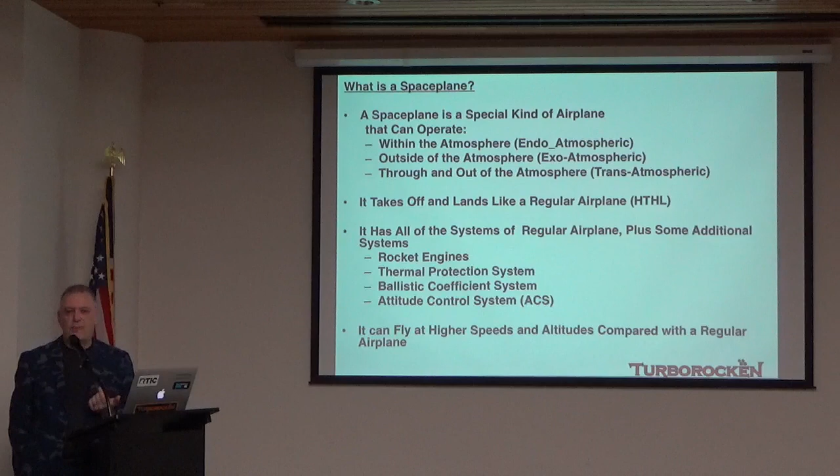Dash number 3 is the ballistic coefficient system. Now what I mean by that is a way that you can control the ballistic coefficient of the vehicle, of the spaceplane. And I'll get into that more later in the talk here and explain some of that. But that is an attribute that is not as appreciated, but is nevertheless important.

And last, we might have an attitude control system, an ACS system. If you're out of the atmosphere, you don't have conventional aerodynamic surfaces to react to control the roll moments of the system - roll, pitch, and yaw. These are moment parameters, moment dynamics of the vehicle. If you don't have any aerodynamic surfaces like conventional aircraft because you're out in space, then you're going to need some sort of an ACS system.

Now this could be a cold gas system, moving you around, controlling your pitch, roll, and yaw. But it could also be an electromagnetic or torque coupling kind of system. These consist of rotor wheels that exert torquing forces as you use a motor to accelerate or decelerate a wheel. You can have a wheel on each axis, and by accelerating and decelerating those wheels, you can exert torques to control the ACS system. So those systems require power, but no gas - a good trade-off there. And once you're out of the atmosphere, you're going to need an ACS system.

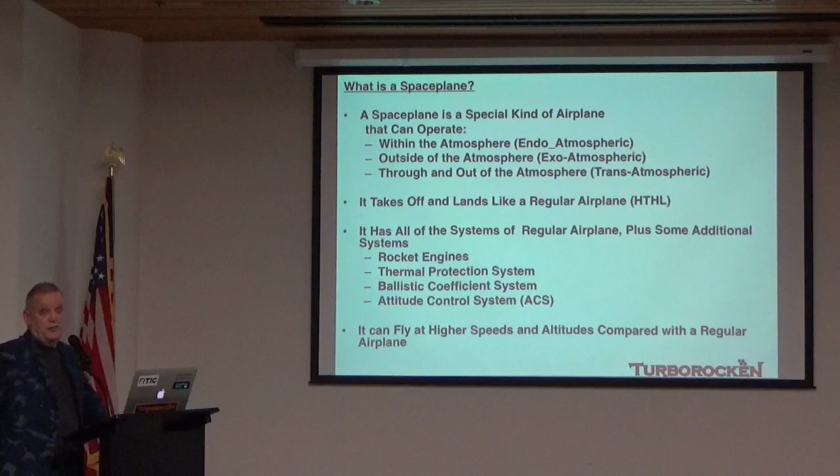Perhaps the most important aspect of spaceplanes is that they fly at higher speeds and altitudes compared to conventional airplanes, and that's what we like about them, and that's what makes them exciting and interesting. So from a usage standpoint, what are some of the fundamental advantages of spaceplanes for space access? And when I say space access, I mean not just orbital access, but suborbital - basically, getting up into an exoatmospheric kind of condition, and the broad range of speeds and altitudes that might entail.

In this world, we adjudicate our performance with a parameter known as the delta V, or the delta velocity. This is a standard term that I'm sure most of you all are very familiar with. The delta V is kind of the change in velocity that your vehicle can experience given the performance limitations of the vehicle itself. It's sort of the coin of the realm for aerospace trajectory analysis.

So the way to think about it is, if you have a vehicle with a given starting mass, the mass initial, and it can expel mass out the back at a velocity of V sub E, the exhaust velocity, then by the time you've expelled all of the propellant that you have on board, at that given exhaust velocity, you will have changed your velocity by delta V, by that amount. So it's just a very simple dynamic equation that applies to rocket vehicles, and you can also roll in terms like drag and gravity to still make this term usable.

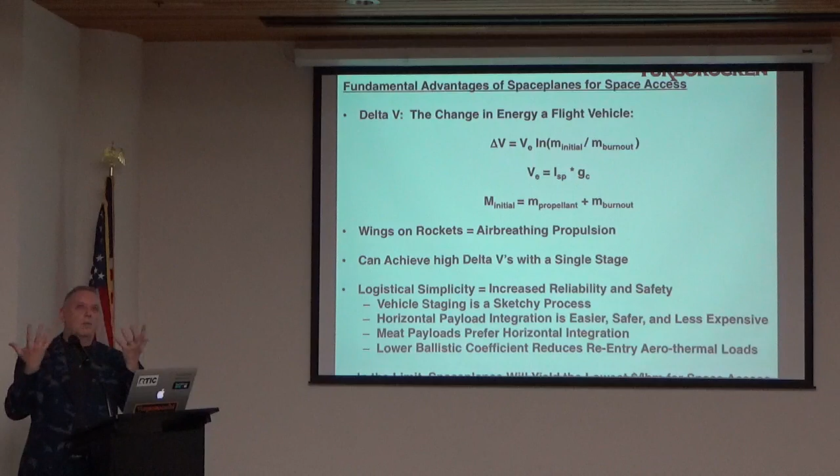It's relatively efficient, because as we know, in a vehicle at steady state velocity, the lift-to-drag ratio equals 1 over the thrust-to-weight ratio of the vehicle. So you can see that if you have a high lift-to-drag on a typical vehicle, you can convert that thrust efficiently into a lift component.

Another way to visualize it: imagine a rocket-powered airplane with a little rocket and wings, and now an identical one pointing in the opposite direction—one flying north, one flying south. Then you put a beam between those two, turn them on, and now they're spinning around.

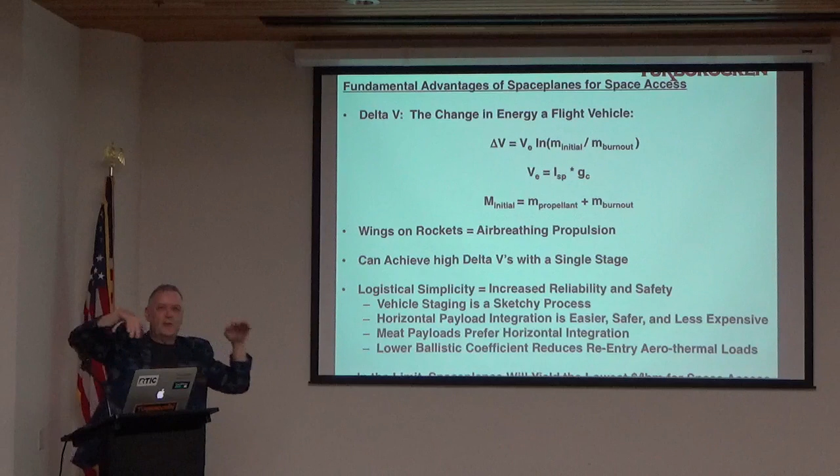So they're kind of a rocket-powered wing. Is everyone tracking this visualization? What's going to happen to that thing? It's going to be like a helicopter—it's going to helicopter up.

In essence, now you're generating air-breathing propulsion—you're reacting air mass down from the rocket-powered fan. That's an example with two rocket planes and a finite radius. But a rocket-powered airplane or spaceplane on an ascent trajectory can be thought of as one of these fan things, but with an infinite radius of boom, if you will.

So I hope you'll keep that in mind and ponder it in your spare time. Are you just trying to be clever with that? No, I'm not.

I'll tell you why: my definition of air-breathing propulsion is a bit more broad. It's using the ambient atmosphere or ambient fluid to create forces on your flight vehicle, and that can be any type of force—lift forces through a wing, or deceleration forces through a heat shield. We don't normally think of a heat shield as air-breathing propulsion, but in the strictest definition of exchanging momentum and generating forces on an aerodynamic vehicle, a heat shield is an air-breathing propulsion system.

So anyway, I leave that to your cogitation.

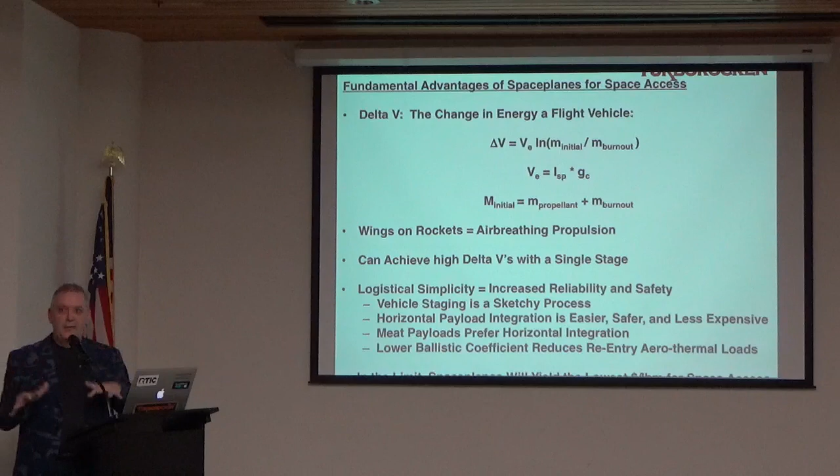Now, unfortunately, the last bullet didn't show up on the screen, so let me tell you what it says. It says, and this is again probably something you might find controversial, I claim that in the limit, space planes will yield the lowest dollars per pound per delta V for space access. And that's not my opinion, that's math. We can walk you through the math on that. If you have a winged vehicle, especially with air-breathing propulsion, you're going to be cheaper in the long run than a vertically launched, staged launch vehicle in terms of dollars per pound to orbit. That statement is freighted with a lot of assumptions, but I urge you to consider it deeply, because it's true.

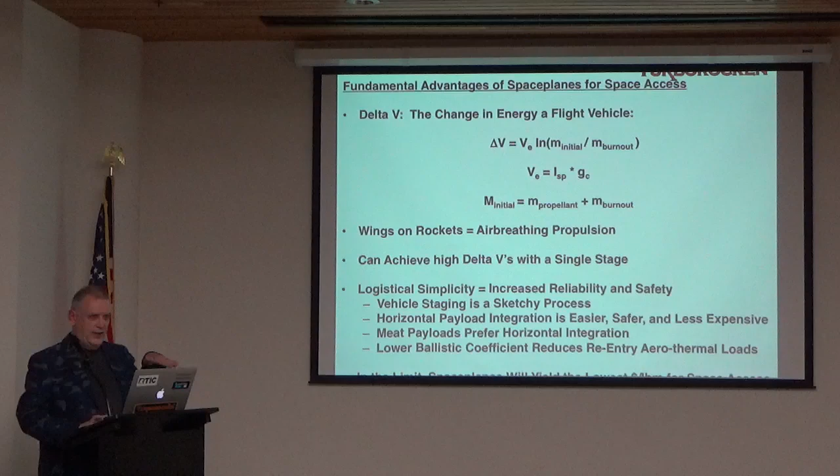I'll take a quick question. I normally don't take questions during my talk, but if it's fast, I'll take one. Do we have sufficient ISP to launch with a single stage now? For vertical launch or horizontal takeoff, horizontal landing? Or the space plane kind of thing, is that what you're talking about?

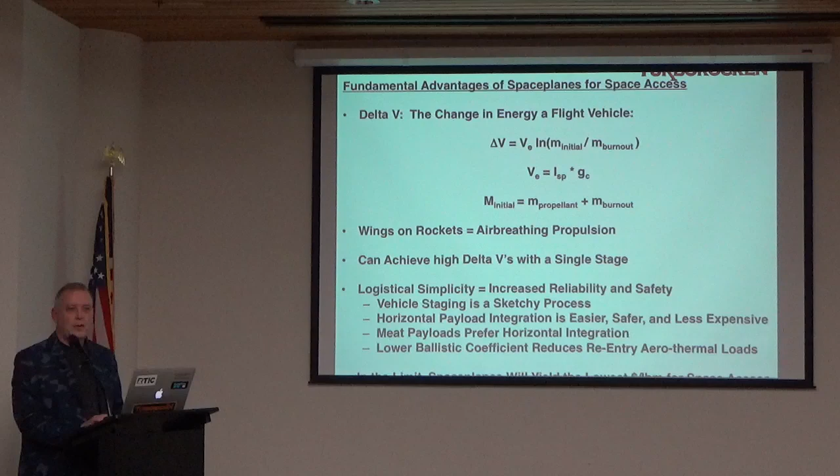That has not been shown, but the theoretical indications show that's clearly possible. I'm going to show you some space planes that, for many developers, they believe it to the tune that they're willing to invest tens or hundreds of millions of dollars in developing those vehicles. But I think it's a good point to bring up. At this point, a horizontal takeoff, horizontal landing vehicle taking off with no staging and achieving orbital velocity has not been demonstrated. Some people say it's impossible. Those people are wrong.

So, space planes. Let's look at a few examples, some familiar to you, some less familiar. Actual space planes I group into the space shuttle, our 30-year friend. Another one is Dream Chaser, being developed by Sierra Nevada Space Systems, a small kind of mini shuttle, if you will. X-37, kind of a classified Air Force vehicle. And then, of course, the legendary SpaceShipOne and now SpaceShipTwo vehicles. These are actual ones that have been built, flown, go into space, and come back.

We also have a number of legacy systems that were proposed but never built, most notably the NASP, the National Aerospace Plane. How many of you worked on NASP sometime in your career? Anyone? Anyone? John, did you ever work on that? I think you did. I worked near it. Okay, you were NASP adjacent.

So, I worked on X-37. Did you ever work on NASP? Kind of a NASP thing.

Another one was X-33. It was kind of a suborbital vehicle that came out of the 90s. We'll look at that - that was another system that had a lot of stuff that was more proposed than built.

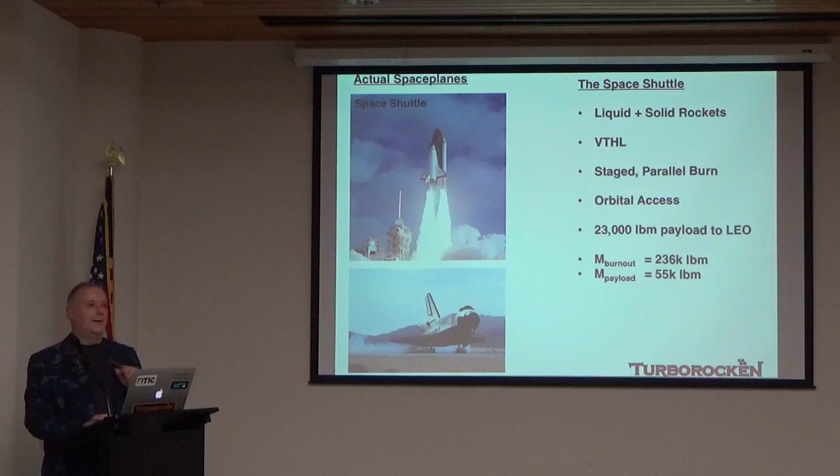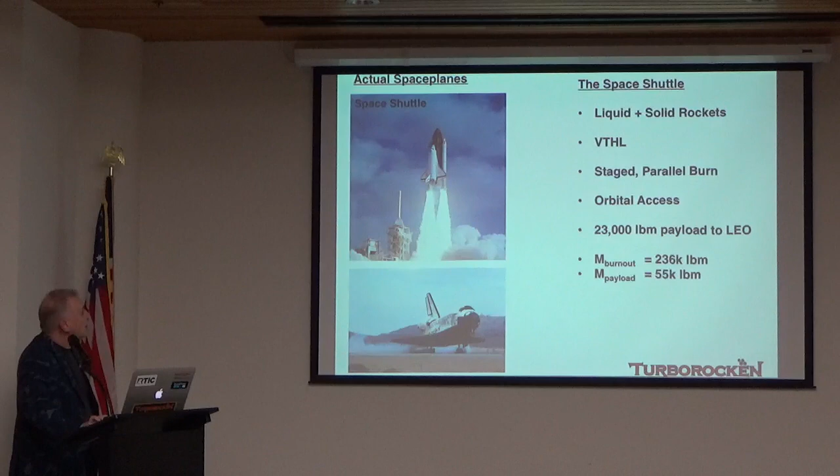It's kind of the superposition of the worst choices of all these systems. Solid rockets are a real challenge, and I think they're not a good choice for that - von Braun would be rolling over in his grave when the solids got strapped on the thing. Just my opinion. But an amazing vehicle - lands like a space plane.

Okay, Dream Chaser, currently developed by Sierra Space Systems. It's boosted on a main vehicle - vertical takeoff, horizontal landing, a couple of stages to get into orbit. The vehicle put in orbit is around 12,000 pounds, and a good fraction of that is payload. It can bring back up to about 4,000 pounds, so kind of an interesting vehicle, and lands on a runway on a front skid. Huntsville International Airport has been cleared to do landings of this vehicle, so they're looking at this as a possible return site for the Dream Chaser, which would be very...

John, was that one derived from the HL-20, the Langley HL-20? It could well have been - that had a lot of predecessor lifting body work, that one and maybe some others. I'm not quite sure on all of its history on that.

What is the booster it's using to get that up in orbit? Well, it's designed to be boosted by a number of vehicles. The baseline vehicle is the Atlas V, but it could go on other vehicles - it could go on a SpaceX Falcon 9, it could go on a Delta, it could probably go on a Vulcan, could probably go on one of the Ariane 5s. So it can fly on multiple systems, but its baseline is Atlas V.

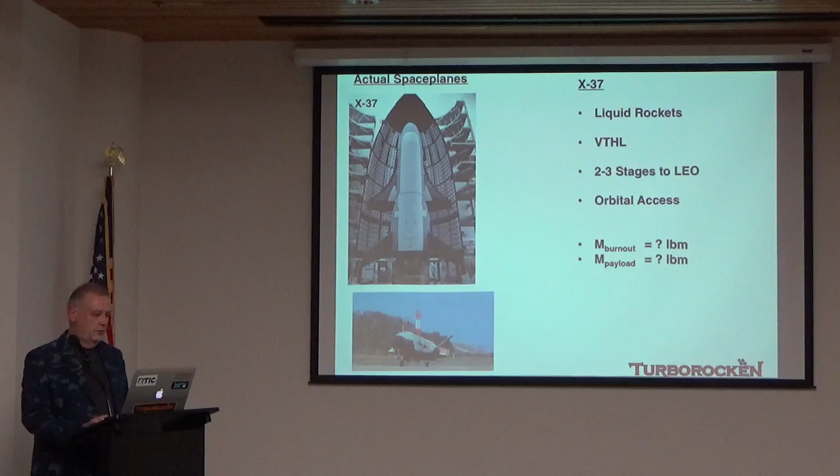Another one, and this is a significant one, which is SpaceShipOne. I presume you know this, but I'm going to go through it anyway. It uses a carrier aircraft called the White Knight 1, that gangly kind of thing with two afterburning J-85 turbojets on top.

SpaceShipOne is carried underneath. It climbs up to about 50,000 feet, then drops off, and its hybrid rocket motor lights and carries it on up to above 100 kilometers. That's called the von Karman line, by the way.

100 kilometers is considered the edge of space. The U.S. is a little bit different - I think they sometimes adjudicate it at 50 miles. But in any case, this vehicle flew on some amazing trips.

Its first flight was in the summer of 2004, and it came back down after that flight. It achieves about 3,000 feet per second total delta V, if you want to look at it from the delta V equation. It weighs about 2,000 pounds and can carry 3 people.

I had the privilege of getting a chance to work a little bit on that system. This is an important vehicle for me personally in my talk here because I see this vehicle as sort of the existence proof for home-built spaceplanes. I'll tell you why its emergence is true to that notion.

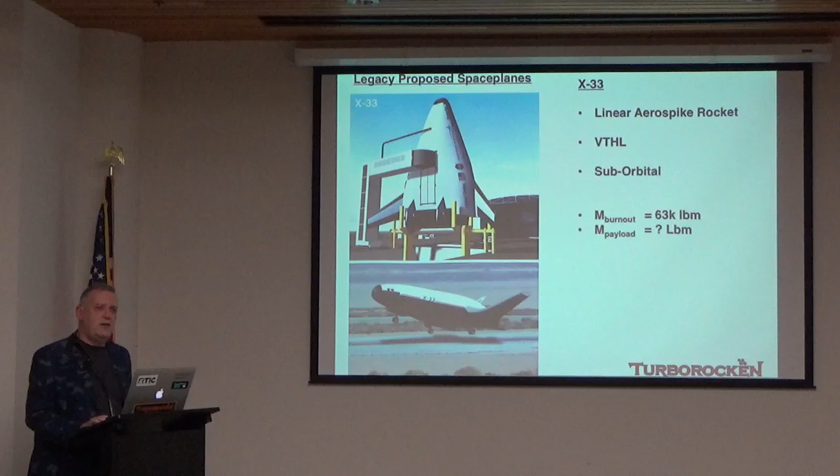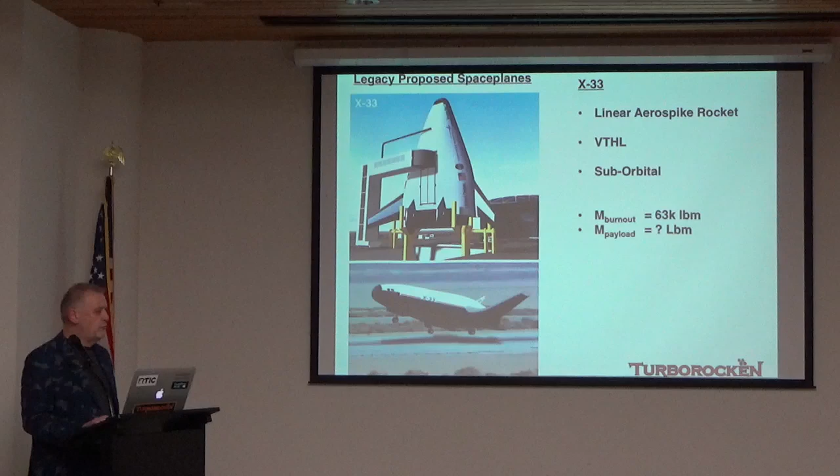Systems were tested. This was going to be a suborbital test bed, and the VentureStar follow-on program was going to be the bigger orbital vehicle. They built some test articles and a lot of the linear aerospike technologies. The linear aerospike engine for this system is actually out on the NASA rocket garden - if you ever want to see that, you can go out to building 4205 and see it there. Another interesting system, but again, kind of a bridge too far, and through some technical failures, it did not survive and was never flown.

This was developed in the 1970s and early 80s during the oil crisis, and the thinking was that we need low-cost access to space that can carry hundreds of thousands of tons of these space power satellites up into orbit and get them set up there.

We need a low-cost way to get those up there, so let's have a system that will do that. This was the system they came up with—an interesting conceptual design study. The system actually closed, meaning the design based on the performance they understood and predicted meant it could achieve the payload and delta V they believed it could achieve. Interestingly, the system used turbine-based combined cycle engines, TBCC engines, plus rockets, rather than scramjets. A very ambitious program, very cool aircraft, but again, never got off the drawing board.

The British also were developing and have continued to develop various spaceplane concepts. The most recent incarnation is the so-called Skylon vehicle. They're still working on that—again, horizontal takeoff, horizontal landing, single stage to orbit. It used a novel engine they now call the Sabre engine, or synergetic air-breathing rocket engine. Basically, it's a combined cycle engine with rocket-type parts and air-breathing parts, taking off as an air breather to get the high ISPs of an air-breathing system before transitioning to a rocket engine to make it to orbit. Again, the design closed. British engineers are some of the best in the world, and they believe the system could work.

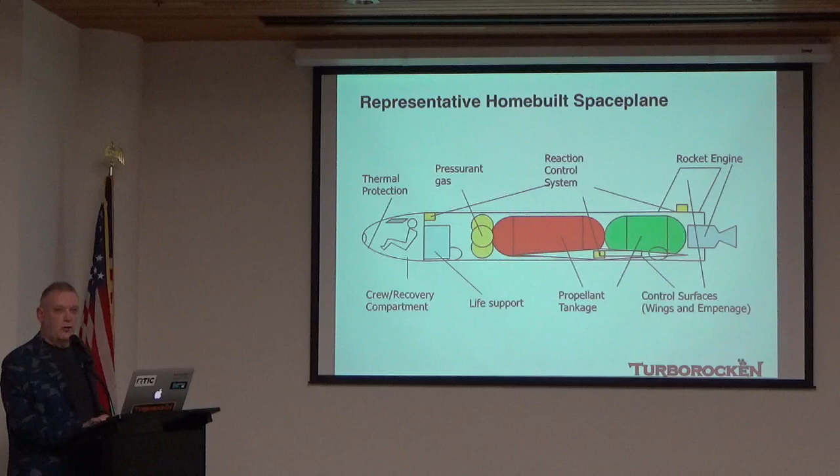It may have some sort of life support system, may have a thermal protection system for the crew, and it may have some sort of crew recovery system. We don't see that a lot - we like to have the pilots stay with the aircraft to the extent possible, though one of the pilots did bail out of SpaceShipTwo when it had its failure a number of years ago. He was the surviving pilot from that. So we don't go into crew recovery as much, but it's still a good thing to have in this picture.

The first is that you're going to have large propellant fractions. A typical airplane might carry about 20% of the gross takeoff weight of the aircraft as propellant.

Dave, you're building an RV-8. How many pounds of propellant do you take off with on a full load, about? 360 pounds. And what is the gross takeoff weight of your aircraft, full passengers, full fuel?

1,800. So 3 over 18 is a good fraction of what you would get. That's pretty good. RV-8 is a good plane.

Another aspect is the propulsion systems are going to be very high performance. They're going to be rocket engines, and hopefully combined cycle engines, which combine rocket engines and air-breathing engines. There's an example of that sitting on the table. We'll talk about that in a little bit.

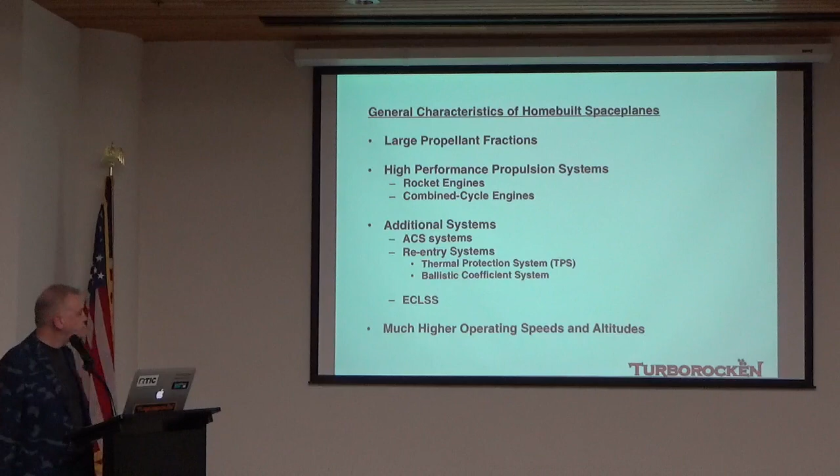The home-built space planes will also need additional systems that we've talked about. They'll need attitude control systems, ACS, cold gas thrusters, or a torquing system. They'll need systems to cover their re-entry, these are thermal protection systems, and also possibly a way to modify the ballistic coefficient of the vehicle, which I talked about and I'll explain in the next chart. And also environmental control and life support system, an ECLSS system, oxygen and temperature controls for the pilot. Sometimes the ECLSS system is nothing more than a space suit, sometimes it's a pressurized cabin. And of course, these vehicles will operate at much higher altitudes and velocities than a conventional airplane.

Now, I talked about the ballistic coefficient. We're going to do a little math here, so hang tight with me. The ballistic coefficient is a term that describes the ballistic characteristics of a vehicle. It's simply defined as the mass divided by the drag coefficient times some reference area.

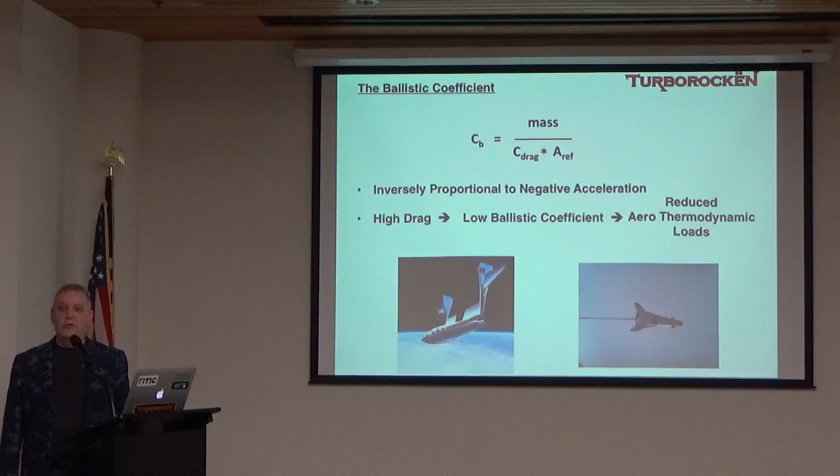If you're a shooter, a reloader, if you like guns, you're probably familiar with the ballistic coefficient for your bullets. The ballistic coefficient is inversely proportional to the negative acceleration. What I mean is if you have a very high ballistic coefficient, like a bullet has, it has, for its given mass, low drag and a low reference area. That means it doesn't decelerate as it's flying along. It penetrates through the air and targets.

Contrast that to a butterfly, which for its mass has very high drag and a very high reference area. So it's very fluttery, and when it's flying along and hits something, it doesn't penetrate very well. So its ballistic coefficient is low.

For aircraft vehicles, a low ballistic coefficient is good because it means the drag is high. High drag resulting from a low ballistic coefficient reduces your aerothermodynamic loads. In fact, if your ballistic coefficient is low enough, you can re-enter from orbital velocities with no thermal protection system at all. Imagine if you're a leaf at orbital velocity, at low enough altitude so you're starting to get a little bit of aerodynamic drag - there's a little bit even up at 100 miles. You can re-enter leaves without burning them up.

And there are a number of concepts for vehicles that have very low ballistic coefficients, and they have no re-entry protection, no TPS system. They just flutter in. Kind of a cool idea.

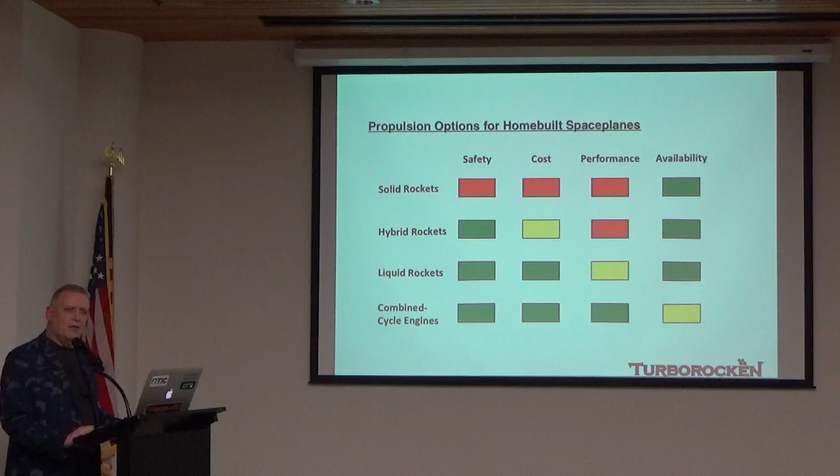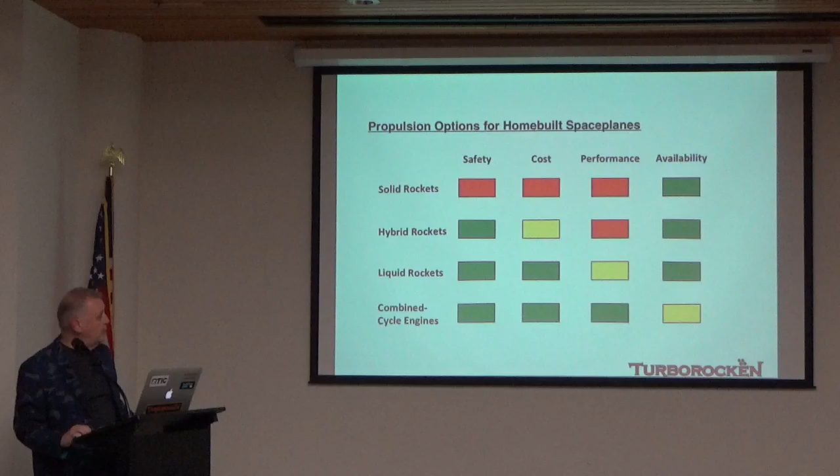What we see here: solid rockets are expensive, not that safe, but available. Hybrid rockets are pretty safe, the performance is meh, and they're not that cheap, we found out. Liquid rockets - their performance could be improved, it's kind of a baseline, it's what we're thinking about. They're available, and hopefully the Turborocket engine I'm going to talk about will help make that more feasible. Lastly, combined cycle engines, which are the union of rockets and air-breathing engines, can be safe, low cost, and have great performance, but they're not quite ready for prime time. We're working on that, and hopefully we'll have those ready for your Homebuilt Spaceplane project by the time you're ready to fly.

So based on that, propulsion is the enabling technology for these Homebuilt Spaceplanes. That's why propulsion was the last word in my title here, because if you can get a decent propulsion system, then maybe you can get a home-built spaceplane to have some halfway decent performance. That's what I hope you'll take away from this presentation today: the emerging propulsion options I'm going to talk about, and the Turborocket in particular, may be the enabling technology, and may allow these home-built spaceplanes to be realized.

I propose that the Turborocket engine is the propulsion solution for these kinds of systems. The Turborocket is a small, integrated pump-fed rocket engine system, sometimes known as a rotary rocket engine. These systems, because of misapprehensions on how they work, have been relegated to the dustbin of suboptimal technology. But I think the potential of these engines has failed to be realized because their operation has been misunderstood, and I'm hoping to change that with my development of the Turborocket engine system. They're relatively simple, inexpensive, and safe because they're not pressure-fed, and because of their unique geometry, they can be combined with other propulsion systems like turbojets to make unique combined cycle engines.

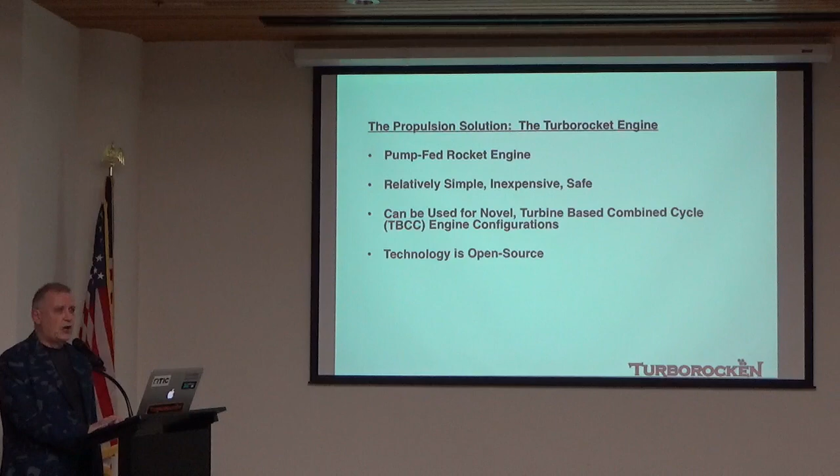Lastly, the Turborocket engine is open source - the technology is open source. Anyone with a good idea and a childlike sense of wonder can develop these kinds of systems. So what is the Turborocket system? If you'd come last week, you'd have heard the whole story. But if you didn't hear that, a Turborocket is a pump-fed rocket engine in which the rocket chamber, the nozzles, the reaction turbine of the system, and the pump - the parts that function as a pump - all rotate together as an integrated assembly. So it's an integrated pump-fed rocket engine. The engine is fully throttleable, meaning you can run the thrust up and down.

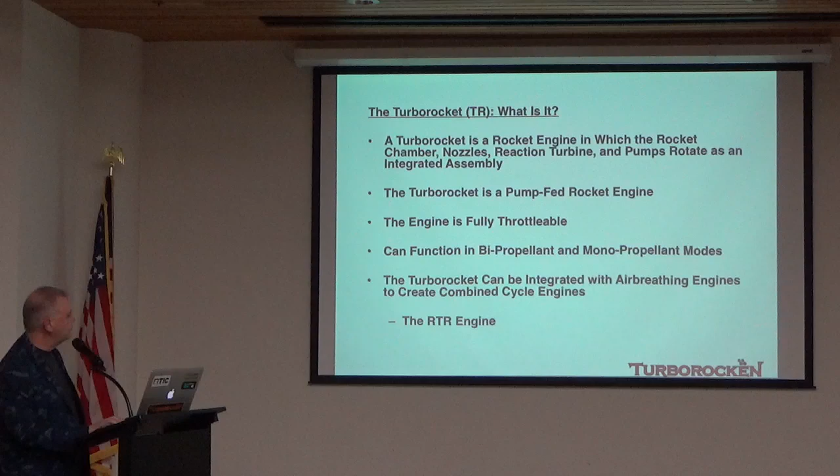It can function as a bipropellant rocket, meaning a liquid oxidizer and a liquid fuel, or as a monopropellant, if you only have one propellant that operates as the propellant for the system. Because of its unique and simple characteristics, it can be integrated with other air-breathing engines to create these novel combined cycle engines.

One of these is the so-called RTR engine, which I'll talk about momentarily. Here's a little schematic of the Turborocket engine. The blue is the static elements, the gray are the rotating elements. We can imagine a fuel and oxidizer coming into the system on the left-hand side, flowing axially downstream, and then turning radially outward to flow into a combustion chamber where the propellants mix and burn to produce a hot, high-pressure gas that exits from the nozzles of the system.

Now the nozzles, as you can see in this view on the bottom, are at an angle relative to the axis of rotation. So the tangential component of the jet velocity imparts a rotation to the Turborocket system, and this is the source of the power that centrifugally accelerates the propellant into the combustion chamber. It's the pump element, it's the pump and the turbine. And so that's why you can get these high chamber pressures from the Turborocket, because it is the tangential component of the jet velocity exiting from the rotor head that provides the power to pump the propellants into the chamber.

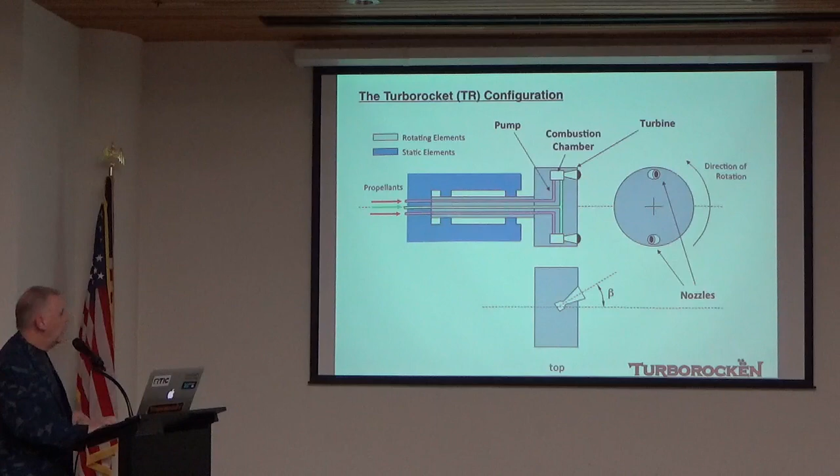But that's not the only component of the jet velocity. There's also the axial component. The axial component is the source of the reaction velocity that gives us our axial thrust, and that's kind of what we're after. So that's how a Turborocket engine works in this cartoon.

Because of that simple geometry, it's round, it's simple, it can be integrated into other systems to create these combined cycle engines. Now we group combined cycle engines into two major groups. One is turbine-based combined cycle engines, TBCC. These might have pumps or fan blades, those are TBCC engines. Or rocket-based combined cycle engines, RBCC engines. This would be a Turborocket engine integrated into, say, a ramjet or scramjet, no moving parts, or a rocket in a tube, a ducted rocket as it's called. So those are the two groups.

The RTR is a turbine-based combined cycle engine, and there are other variants of that. I'll show you some other concepts, including a fan-based Turborocket engine system, which is kind of the model shown on the table. That has a little fan that can be integrated with the turborocket to produce one of these combined cycle engine performance attributes.

Okay, getting back to the RTR engine. So the three-letter acronym there, RTR, the R stands for RTR, and the TR stands for turborocket. So it's the RTR turborocket engine. There's a long, sorry story about why R stands for RTR and the recursive nature of the acronym. I apologize for that. But the basic idea is that we integrate a turborocket into the aft end of a basic standard turbojet engine, and it fits within the turbine hub diameter of a standard turbojet engine.

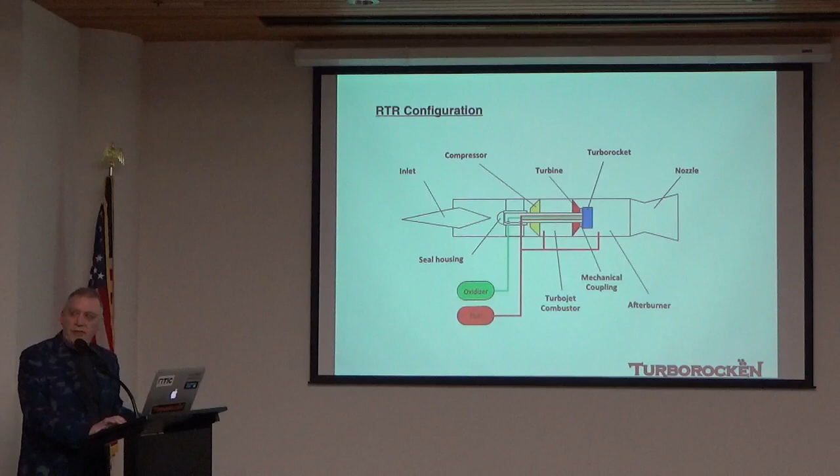Basically, the turborocket engine supplying shaft power to the compressor, that air blows back into the afterburner region, and the fuel effluent from the turborocket mixes and burns, like a standard afterburner, to make thrust. That's an air-breathing engine, and this is the air turborocket mode. I'll show you the cartoon and let you ponder how that system worked. But this was the initial system that I thought had a lot of promise. And the RTR engine is, I think, one of the unique and possibly high-performance turbine-based combined cycle engines that utilizes the turborocket engine.

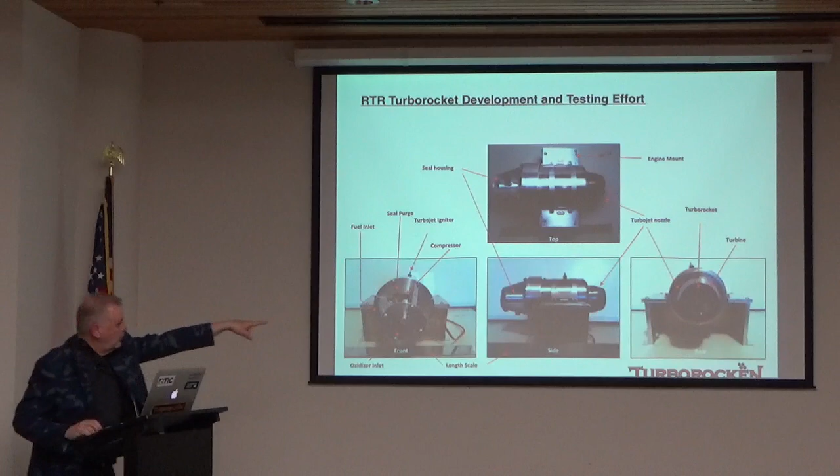And then it has a small turborocket engine in the back. You can see it on the far right-hand side, pointing to the turborocket engine integrated into it. The turborocket engine was very small, about 1.25 inches in diameter.

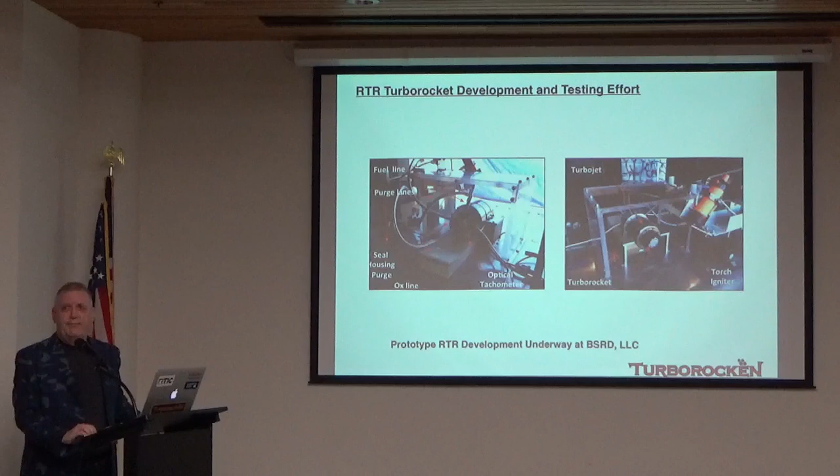So I hot-fire tested this engine system and was able to show some of the functionality. The performance wasn't super high, but I still think it was pretty amazing to get this far. Here was an honest-to-goodness turbine-based combined cycle engine that combined an actual running turbojet and an actual pump-fed rocket engine that had been hot-fire tested, that you could hold in your hand. I defy anyone to show me another engine like that, a turbine-based combined cycle engine you could hold in your hand that had been tested.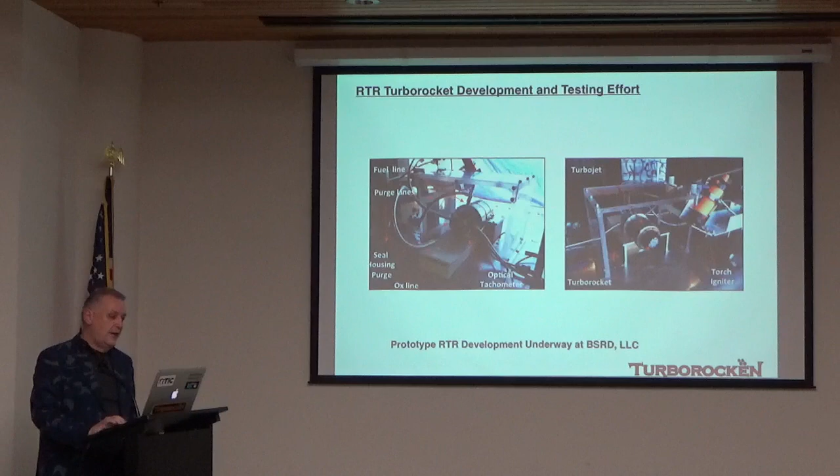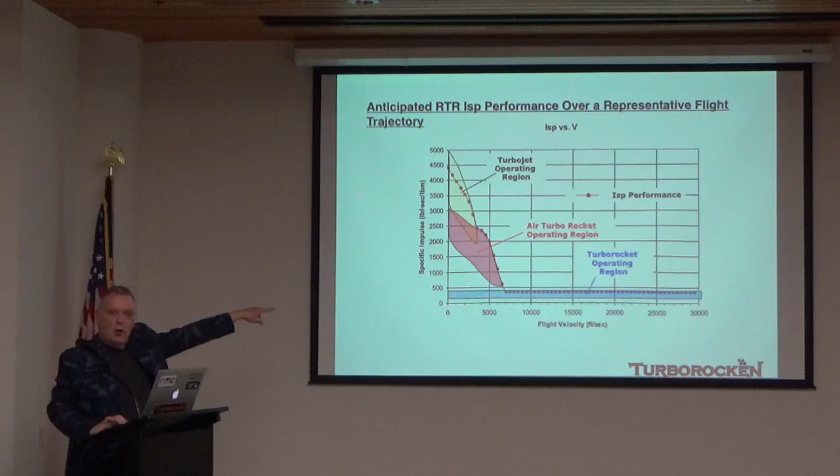Okay, so RTR engine anticipated performance. Here's the chart that shows the specific impulse as a function of flight velocity. There's a lot to unpack here, so I won't bore down into significant detail, but your takeaway is that dotted line shows the possible engine performance you could get out of the RTR engine flying on some nominal flight trajectory. You're taking off from the runway, flying up through the air, going faster, going higher. As you go through this flight trajectory, the RTR engine would deliver these kinds of ISP performances as it transitions from a turbojet operating region in yellow, through an air turborocket engine operating mode, before transitioning to a turborocket engine operating mode. So that's the kind of ISP performance you could reasonably expect from the RTR engine.

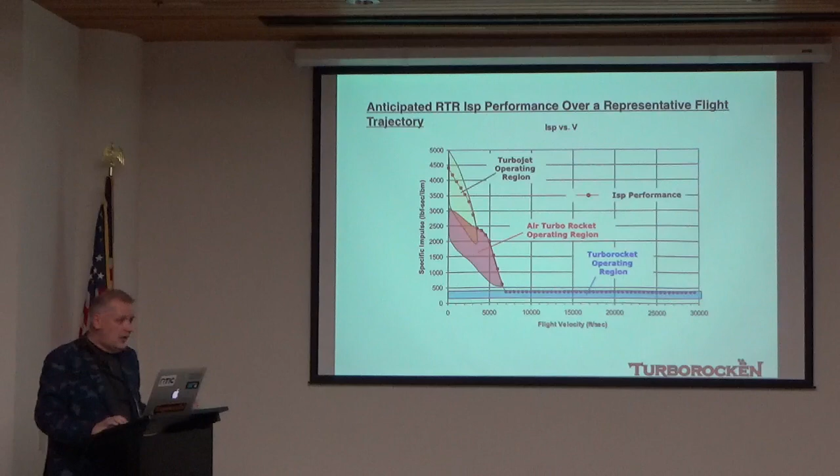And if you know anything about ISP performance on combined cycle engines and rocket engines, if you could achieve something like this, it would be extraordinary. The delta V's you could achieve with a vehicle with this effective ISP over a trajectory would be extraordinary.

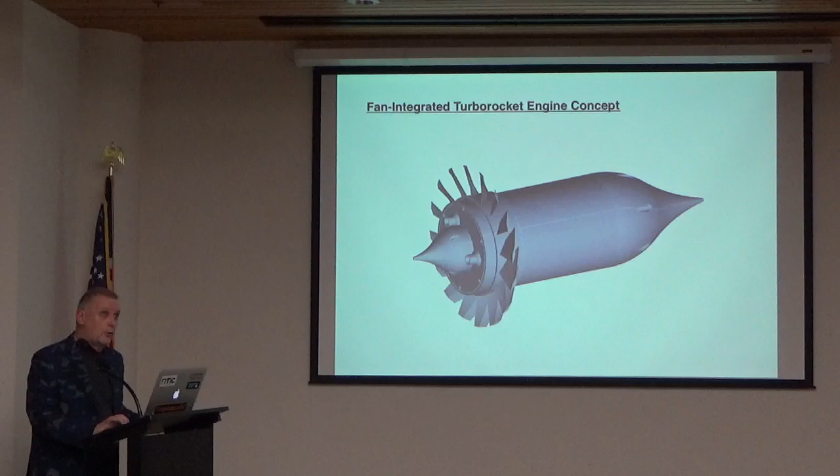Okay, last picture, here's kind of the cartoon version of this fan-integrated turborocket engine. Basically you have your basic turborocket engine, the nozzles shown here on the left-hand end of the system. But it has a mechanically coupled fan that could be a high-performance fan, and because the turborocket can generate shaft power, you can turn that fan and operate both as a combined cycle engine, as an air breather, and then as you transition out of the atmosphere, you can decouple the fan and operate as a pump-fed rocket engine. So, very simple system, probably the simplest incarnation of a turborocket engine-based combined cycle engine.

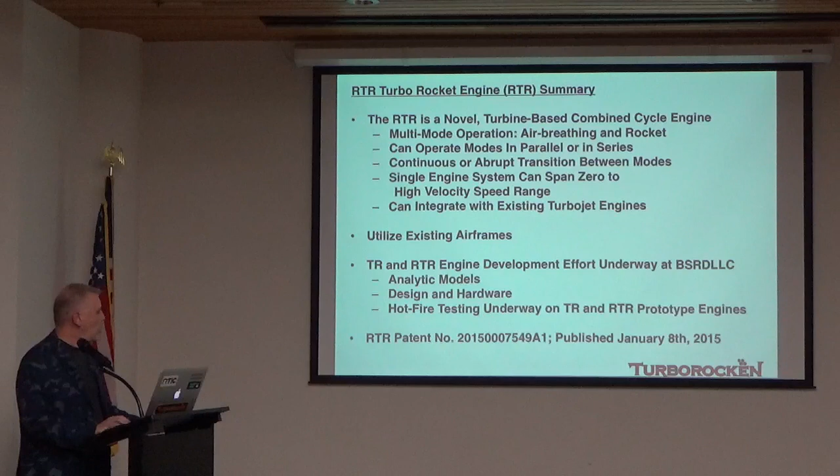Okay, we're getting close to the end here, folks. So I'll summarize a few things, then move on to some conceptual spaceplane vehicles. In summary, the RTR is a novel combined cycle engine utilizing the turborocket engine. If you can utilize these systems, you can integrate them into existing airframes and vehicle systems, possibly to create these home-built spaceplane systems. The turborocket and RTR engine development is underway with my little company, BSRD. We've got some analytic models, design and hardware. We're doing hot fire testing, and a patent has been issued on the RTR. Not the turborocket, that's open source, but the RTR has a patent issued a few years ago.

Okay, example of home-built spaceplanes. That's kind of what I hope drew you to the presentation here. Let's look at a few conceptual home-built spaceplane examples, in which we synergize the experimental aircraft guys and the experimental engine builder guys. Obviously, SpaceShipOne is kind of an existence proof, showing the bounding circumstances for these kinds of systems and how we can integrate a turborocket engine into existing turbojet engines and utilize that for these spaceplane concepts.

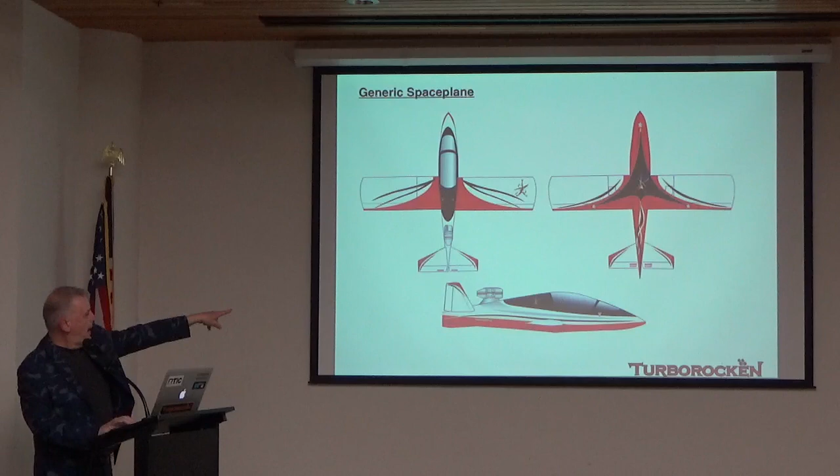You can buy the engine for it for about another $50K. So for under $150K, you can have your own little high-performance jet engine. It's a really cool single-place, single-seat jet-powered aircraft. Wingspan is about maybe 15 feet, total length maybe 18 feet. Really small little guy. You can see the engine on the back, a little turbojet engine. So we can take this baseline vehicle that already exists and has already been flown, and modify the turbojet engine on it.

to include a turborocket engine, and it might look something like this. So here's our spaceplane version of this subsonic aircraft. We're obviously going to have to add a couple additional things. We'll need some tankage to carry the oxidizer, which can be external tanks. The wing is more than sufficiently strong to carry that.

The vehicle is not designed to fly above supersonic velocities. Its airspeed VNE is about 300 knots. So if it goes supersonic, it'll need some way to trim out the control at supersonic velocities. There's ways to do that — I'm showing some little canards, but there are other ways too. You might need some sort of ballistic coefficient device, such as a streamer or maybe a drag chute, to control yourself if you're re-entering and want better control.

Then you'll have to modify the engine with an integrated turborocket engine. This system isn't going to have a high delta V, but you should be able to get well above the Kármán line of 100 kilometers, probably not 10,000 feet per second, but somewhere between 3,000 to 8,000 feet per second delta V.

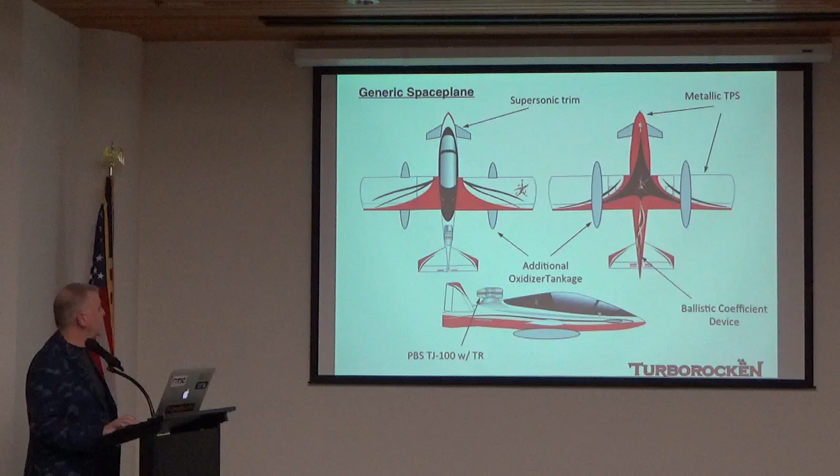The engine used on that vehicle is the Velká Bíteš PBS TJ-100 turbojet. This is a Czech-built little turbojet engine, about 20 inches long and about 10 inches in diameter. This engine can be integrated with a turborocket engine, shown on the right-hand side — a small turborocket engine that would fit in the hub space of the Velká Bíteš engine.

We typically say that the turborocket engine will generate about 5 to 10 times the thrust of the turbojet it might be integrated in. The Velká Bíteš generates about 250 pounds of thrust, so the turborocket engine that could be integrated would produce between 1,200 and 2,500 pounds of thrust, and it could still fit within this engine.

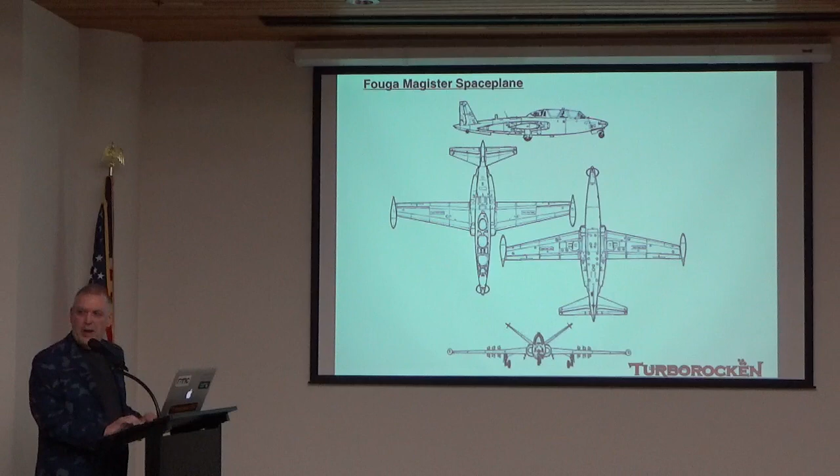If that makes sense, okay, let's look at another conceptual space plane. This is one of my favorite aircraft, not as well known — a French aircraft known as the Fouga Magister. It was a training aircraft developed by the French in the 50s, and it's a very excellent aircraft. It was actually designed as a glider, so it has a very long wingspan and a relatively low ballistic coefficient, which is nice for reentry issues. It has hard points for weapons, so that's handy — you can mount machine guns in the nose, but we would take those out. It's jet powered, with two engines that we'll go into in a moment.

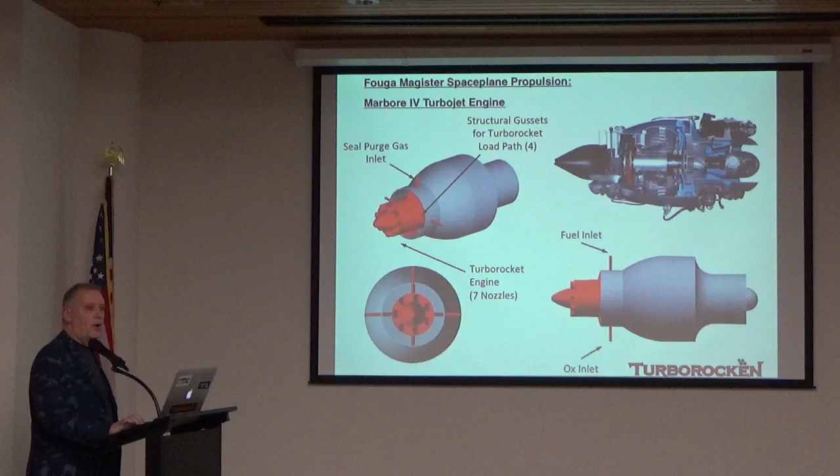To make this into a space plane, we'd use similar systems: external oxidizer tanks carried on hard points, a supersonic trim, and modifications to its engines to integrate a turborocket engine. The Fouga Magister uses the Marboré series of turbojet engines developed by the French company that was the predecessor to Snecma. There's a few varieties — this one uses the Marbore IV turbojet engine, shown here. The engine is about 400 pounds, about 3.5 feet long, and it's kind of a fat boy because it has a radial compressor, probably 2.5 feet in diameter. On the exit cone, you can integrate a turborocket engine in that system quite easily without interrupting any of the turbojet elements.

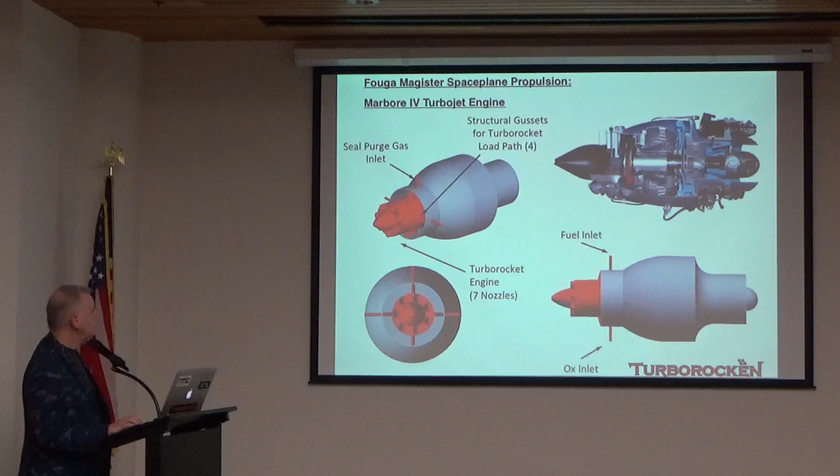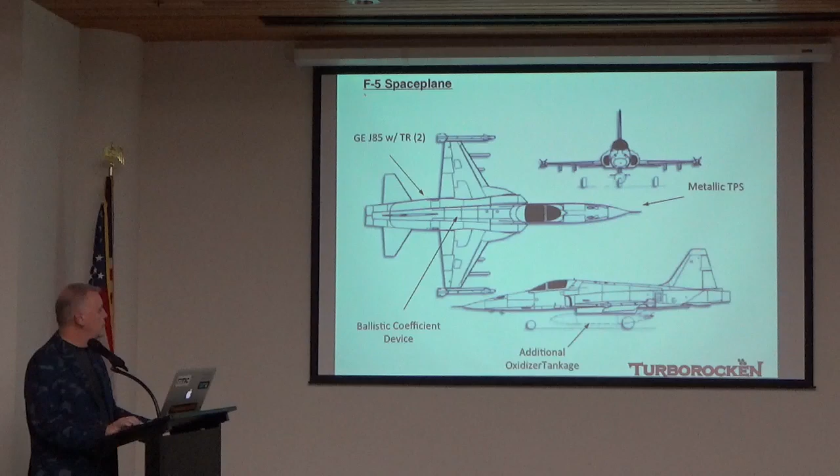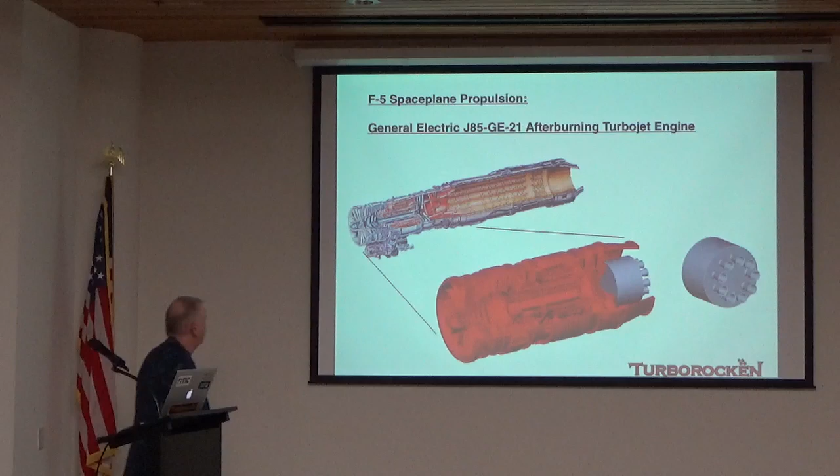So those are some concepts for that. The GE J85 afterburning version, the -21 version, can also be integrated with a turborocket engine sitting into the aft space of the turbine hub, right here. I hope that makes sense — that's the sizing constraint on the turborocket integrated with an existing turbojet engine.

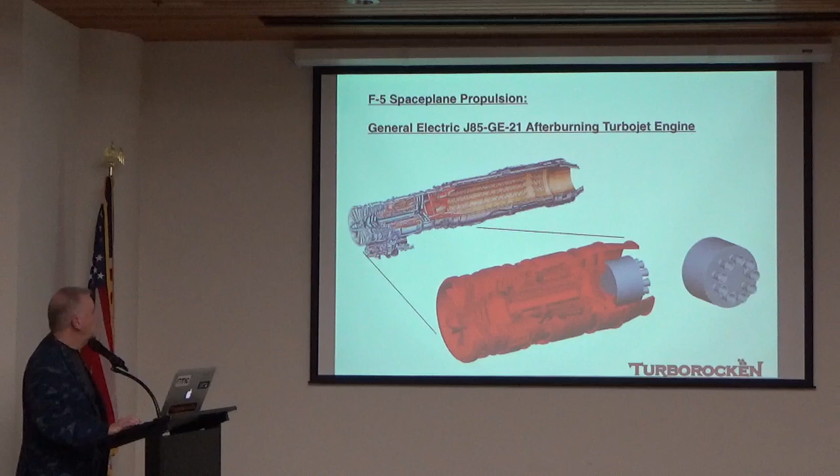Okay, so to summarize what kind of performance you could potentially get out of these systems — the subsonic aircraft, the Fouga Magister, and the F-5 — the first column is the empty weight of those vehicles.

That's just no passengers, no mass, just the dry weight of the vehicle. Second column is the MGTOW, maximum gross takeoff weight - the fully fueled vehicle, how much propellant you can put in there. You can see those respective numbers. The difference between those two is the propellant load you can carry. 500 pounds is about max for the Sub-Sonex. The Fouga can do about a ton. And the F-5 has an extraordinary 16,000 pounds of propellant load, maxed out at MGTOW.

So if you use our delta V equation that we showed back on slide 6 - there'll be a quiz at the end, be prepared. Just kidding. If we plug in an effective ISP, a mission-averaged value over the air-breathing and rocket portions, of say 500 seconds, then that's the delta V achievable with these vehicles.

The Sub-Sonex could get an extraordinary 11,000 feet per second. The Fouga Magister not as much, 6,400 feet per second. And the F-5, an astounding 17,000 feet per second of delta V is achievable with that system. When I say 500 seconds ISP effective, that's an integrated value accounting for drag and ascent issues that knock down vehicle performance. So these are not unrealistic numbers that you could theoretically achieve.

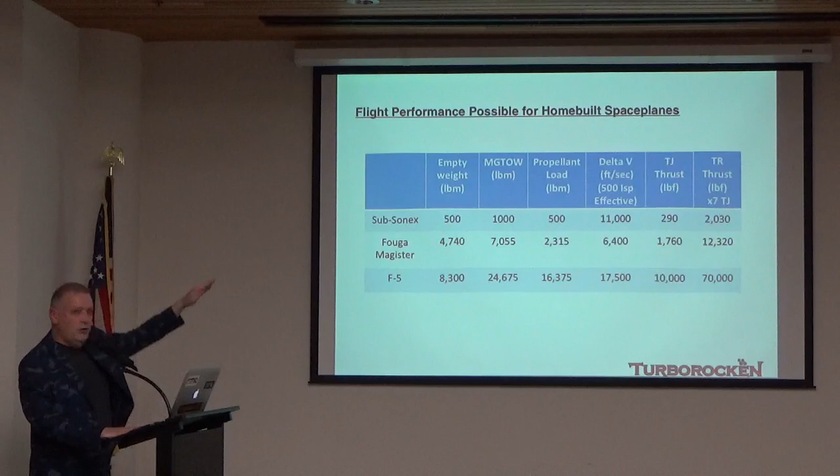Again, the turbojet thrust powers are given there. The Sub-Sonex's 290 pounds of thrust. The two Fouga Magister engines each put down about 800 pounds and change. And the two afterburning J85s on the F-5 produce about 5,000 pounds of aspirated thrust each. With a multiplier of 7 times the turborocket thrust against the turbojet thrust, you can see what those things are - that's a snapshot of what you could achieve with these conceptual home-built spaceplanes.

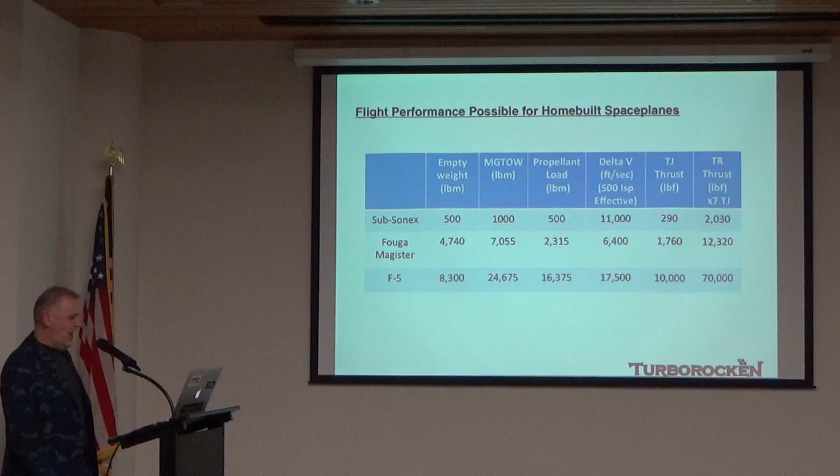Now, some might claim that an F-5 with modified J85 afterburning engines hardly qualifies as a home-built turbojet engine, but I disagree. For the enthusiastic home builder, nothing is impossible.

It might provide freedom - flying through the air with turborocket ease, maybe some transportation at high speed, interesting things you could do. Maybe there's a wealth creation that is positive for everybody. It'd be quite adventurous, no doubt. And there's the intellectual and conceptual challenge of it.

And so I leave you with the quotation: if you understand, I don't need to explain anything. If you don't understand, no explanation is possible.

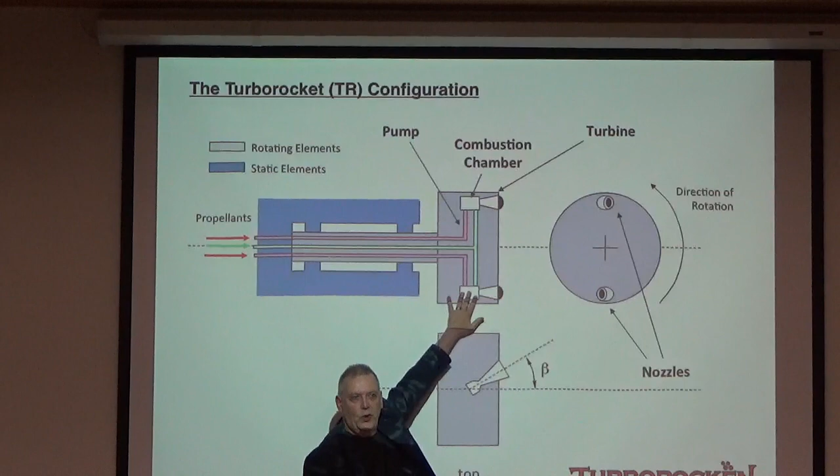What happens if you have, and what Noah's getting at is, you have this spinning rocket spinning around. The propellant flows in, flows out to the edge of the engine, and as it's flowing out from the rotation, the pressure that it achieves is a linear function of the density of the fluid. So if you have a really high density...

It's just rho GH, right? It's rho G. It's 1/2 rho G. It's 1/2 the dynamic pressure. The pressure that you get here from the rotation is equal to 1/2 rho U squared, where U is the rotational velocity. So yes, it's a linear function of density.

I was thinking about it like a hydrostatic pressure in a way. Yes, that's a good way to think about it. Or like V squared over R equals acceleration, kind of. Yeah, that's what I was trying to get at. Yeah, it's the standard hydrodynamic, hydrostatic pressure in a rotating cylinder.

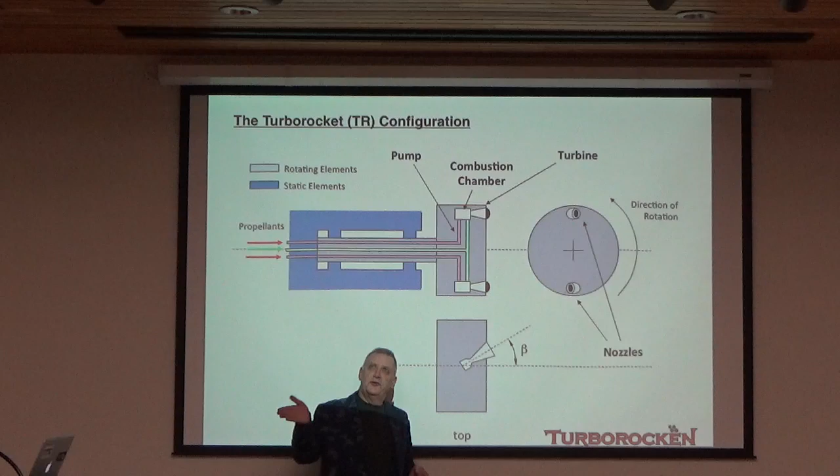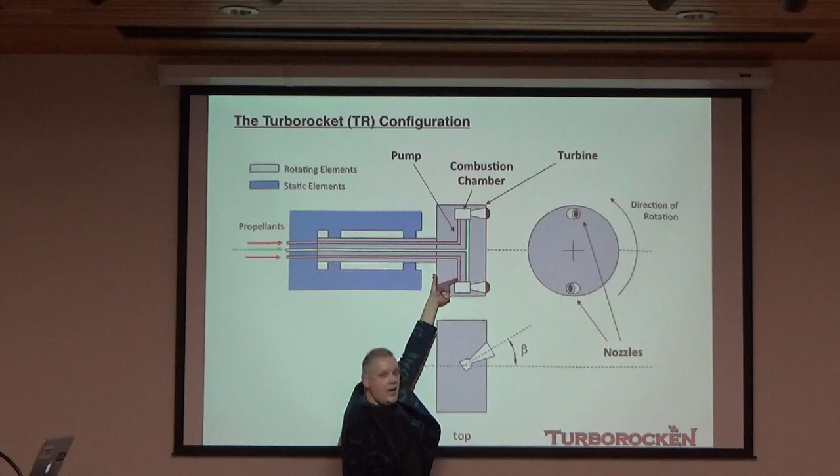And the way that is accommodated is that the pressure drop across the injector solves that. So are you forced to choke off the oxidizer in that? No, the system will set up a dynamic equilibrium operating condition in which the dynamic conditions are achieved by the tangential component of the jet velocity, and the power supply pumping those two propellants into the chamber.

But you can't control the mixture ratio without controlling the orifices. You have to set the orifice sizes in order to get the appropriate pressure drop so that they both arrive at the chamber. I guess that's what I meant about choking the oxidizer off. You have to constrict it at the injector plate in order to get the right mixture ratio.

Well, so you either constrain the mixture ratio and have to set the orifice sizes, or for a given set of orifice sizes, the mixture ratio is an output variable. It's one of the solved variables. You don't want to do that though, the impulse just gets creamed when you do that. You can set the orifices such that you get the appropriate mixture ratio.